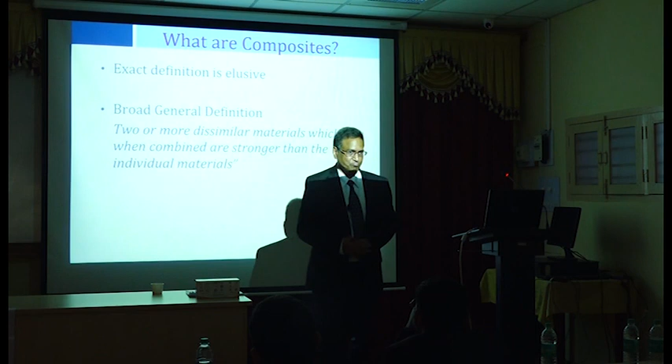Okay, so we will talk about composites. So what does the term composite mean to you? What does term composite mean to you? Perfect. That's the simplest possible definition. If you combine more than one material, can be 2, can be 3, can be 4, whatever, then we call it composite. That's a layman's definition of composite. So, by that definition,

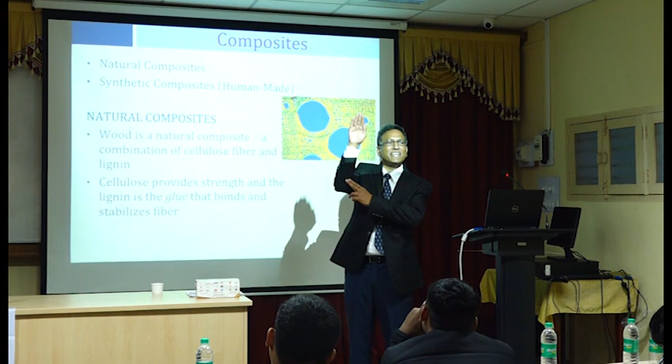is wood a composite? Of course it is, because there is fiber in your wood that gives you the actual bending. You'll see sometimes the trees are bending like this, but they're not fully falling over, right? Why is that happening? Because there's fiber in there. That fiber is preventing the tree from falling over. And then there is lignin that combine together and they act. This is the key thing. They act together. Okay? So that makes it a composite material.

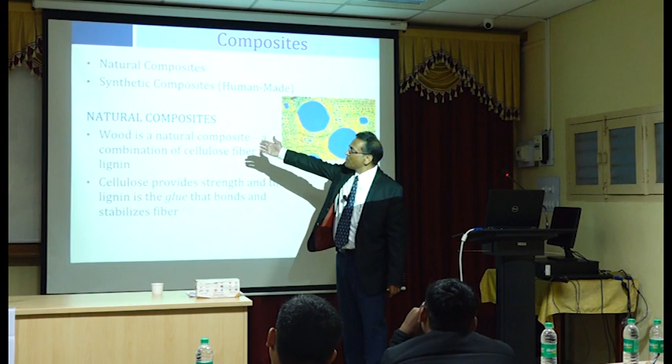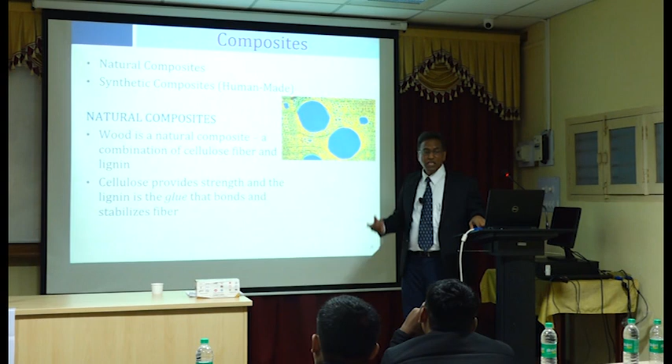So wood is a natural composite. So the fibers provide you strength, and the matrix, which is the lignin, provides, in a simple term, its glue. It keeps them together. Is concrete a composite?

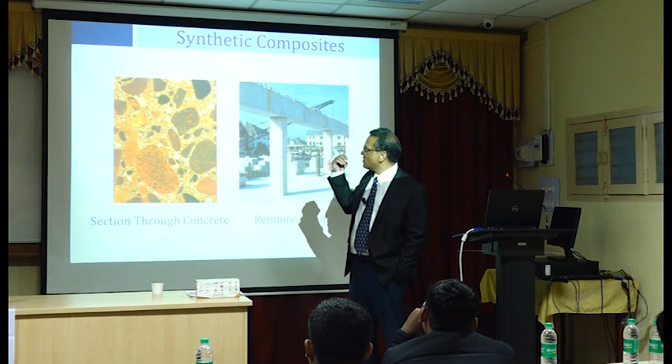Definitely, because at a microstructure level, you have so many different materials and they are all working together. Cement paste, you have coarse aggregate, you have fine aggregate, they are all combined. Once they harden, they work as a single unit.

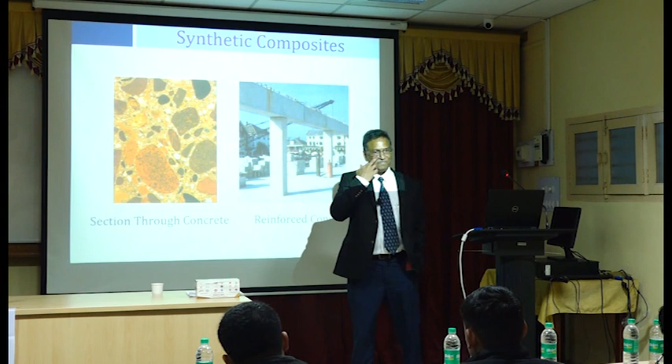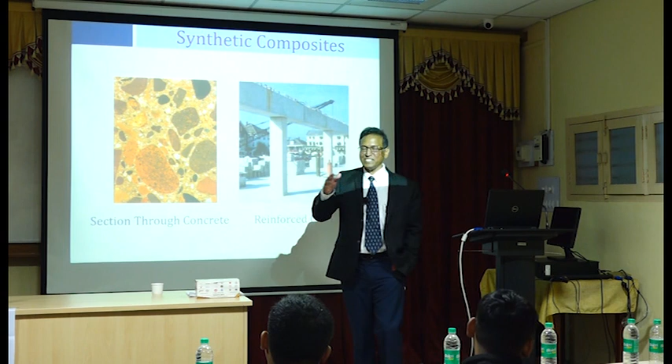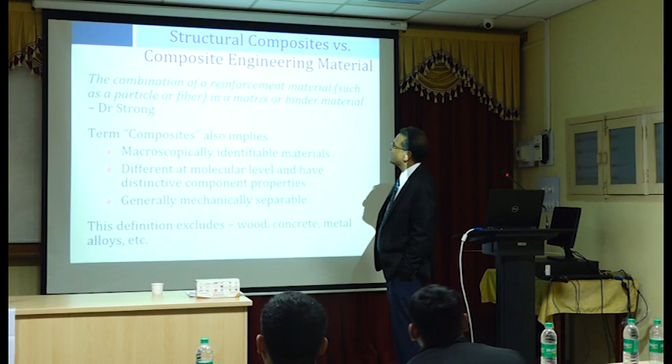What about reinforced concrete? So slowly we are building on it, right? So this is concrete. Now we are adding one more item to the material, which is reinforcing bars. We place them in proper locations to gain the strength the way we want it to gain, and that's a composite material. So based on that, we can say a combination of reinforcement material in a matrix or binder material.

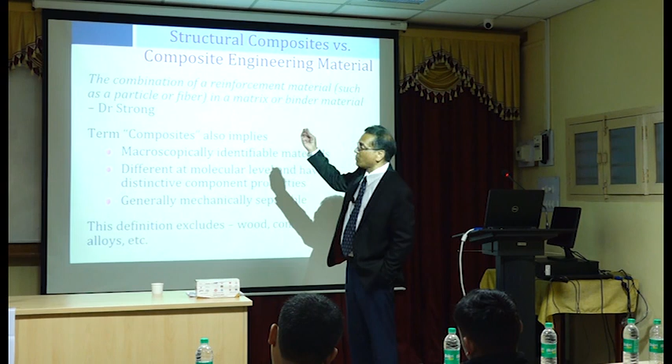So we started with saying, oh, if we add two materials, that's composite. That's what we started with, right? Then we said, okay, we want material where one is fiber and the other one is matrix, or binder. So those two, when combined, that's a composite. Okay, that's slightly one level better definition. So, in other words, we did not say that. We all know that

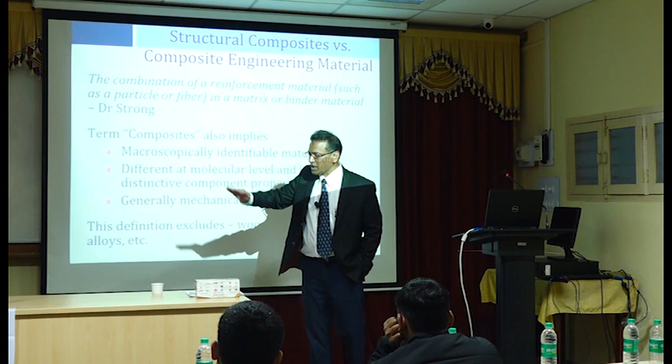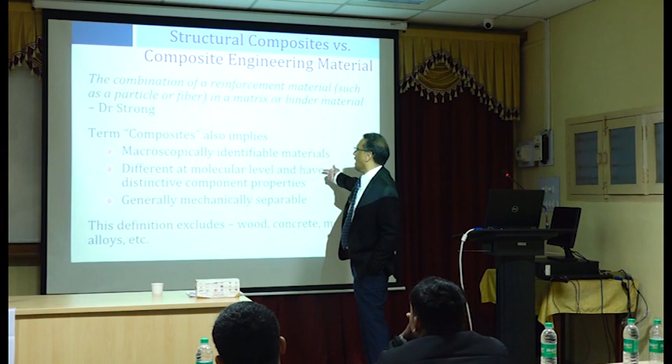composites are composed of macroscopically identifiable material. So if you cut a section and look under the microscope, you can easily distinguish between the different materials, okay? And at molecular level, they have distinctive component properties, which is self-explanatory. Generally mechanically separable. That means you can separate these mechanically.

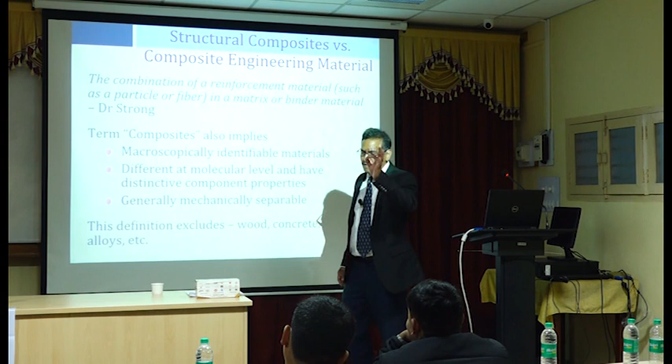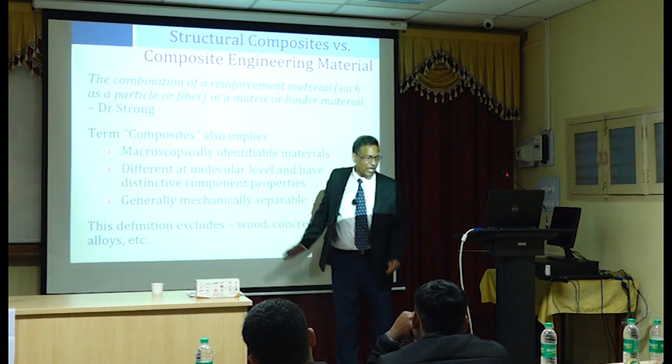Can you separate the fiber from the cellulose in a tree? You can't. So that will exclude this definition. What about concrete material? Can you separate them? No, not possible. Same thing with reinforced concrete. You probably can, but the materials will lose their characteristics. So that way we will define it in a slightly more detailed manner.

What's an aspect ratio? Aspect ratio is defined as, yes, length over the dimension. Okay? It can be diameter, it can have square cross section for fibers too. It won't always be circular cross section. So the dimension will give you your aspect ratio. The aspect ratio has to be adequate, or it cannot be overly long, to transfer the loads between fibers, and the fibers are chemically bonded.

So we are adding so many conditions here. First we are saying the composite itself needs to have reinforcement, needs to have polymer, and then you have an aspect ratio requirement to be satisfied. Then we are saying the load has to be transferred between the fibers. If they don't transfer, that means all the fibers will pull out, right? You have matrix and you have fiber, and if the load is not transferred between the fibers through the matrix, the fibers will all pull out, okay?

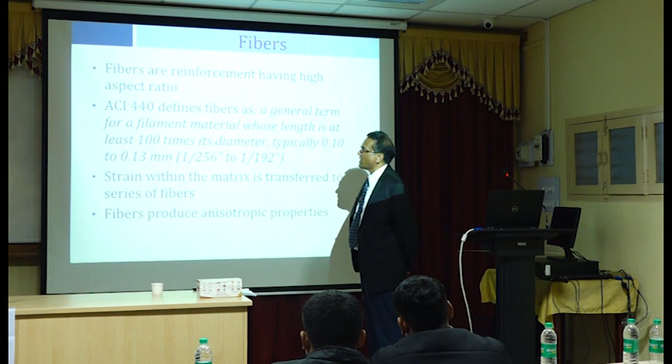So fibers are reinforcement having high aspect ratio, and ACI 440 is the primary committee that is creating all these reports on fiber reinforced polymer. ACI stands for American Concrete Institute. That 440 committee has about 8 or 9 reports. Almost all the information available throughout the world is generally represented in ACI 440. So they have it all combined, and it's a very good resource for advanced studies and to understand the common practice.

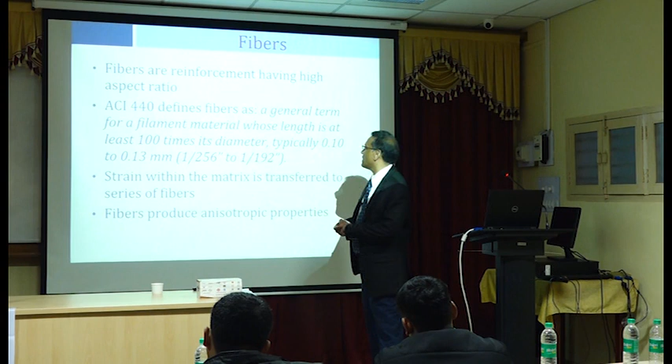It defines fiber as a filament of material whose length is at least 100 times its diameter. So now they are defining it more clearly. If the diameter is, let's say, D, then 100 times D is the minimum length you must have in order for it to qualify as a fiber. Okay, so typically our diameter is 0.13 millimeter, that's what they mention. And 100 times that is 13 millimeters. So that can qualify as a fiber, structural fiber.

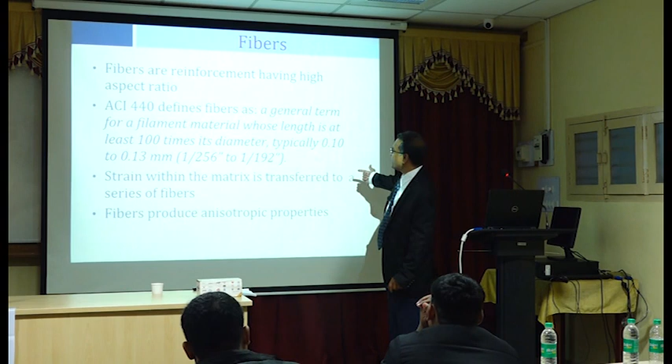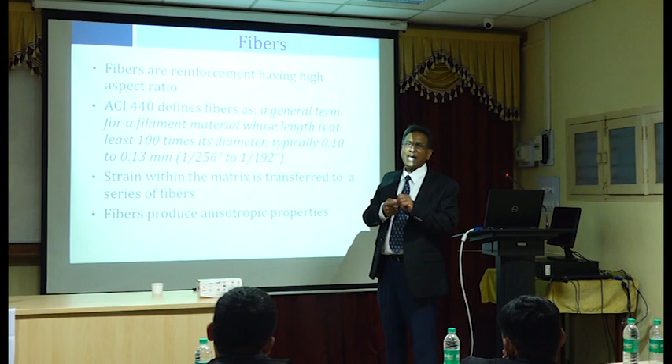And the strain within the matrix needs to be transferred to a series of fibers. So the force transfer is a requirement. Unless that happens, you really don't get any strength of the composite. Just like, I don't know if you have done any pull-out tests for concrete. You're trying to pull out the bars. At some point, the bars will pull out. That means at that time, it cannot be used as a composite material.

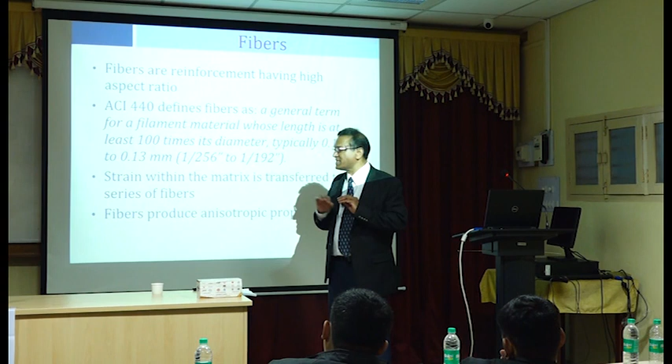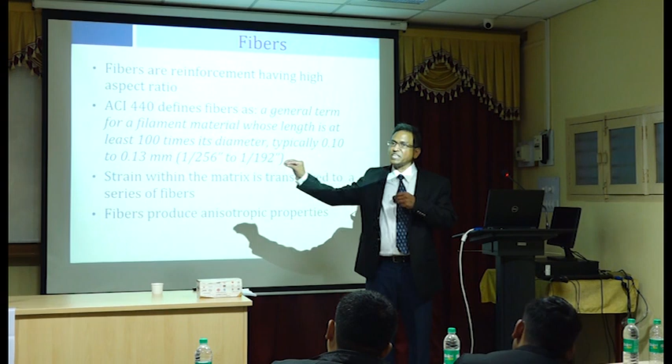So because these fibers are placed in very predefined directions, the strength of the composite is also directional. That means it will be strong in the direction of the fiber, and perpendicular to the direction of the fiber, it won't be very strong.

So what about resin matrix? It doesn't matter how good your fibers are, unless you have a medium through which there is load transfer, you are missing out on something, right? So fibers cannot be used by themselves. If you use just fibers, it is of no use. They will break, of course, and whenever you have the smallest compressive force, there will be stability problems. So in compression, the fibers will never ever work by themselves. In tension, maybe, but not in compression.

So matrix is needed to provide this kind of holding type of action for the fiber, and it's relatively rigid. If you see, the matrix is somewhat rigid when it is hard, and therefore it will give you stiffness. So stiffness is very important in case of stability, right? Whatever little compression is applied, the composite can become unstable, and if you have a matrix that gives some dimensions or some thicknesses, then it will be able to resist some amount of buckling tendency.

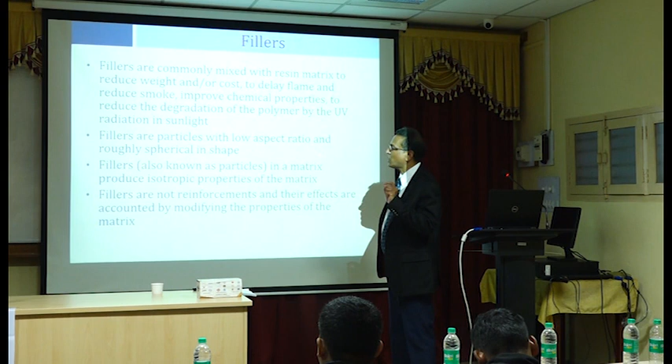What about fillers? Fillers are generally used to reduce weight if needed, and the matrix, the resin material can be expensive, and of course you can provide fillers as retardants. That means they can provide some amount of fire resistance due to heat and flame. They can be used to reduce smoke and improve chemical properties and so on and so forth.

One thing you have to take care in case of composites is exposure to UV radiation. So most of the composites are affected by UV radiation. Okay, so that's a very important aspect. So if it is directly under sunlight, after some time it will probably degrade, it will lose its integrity.

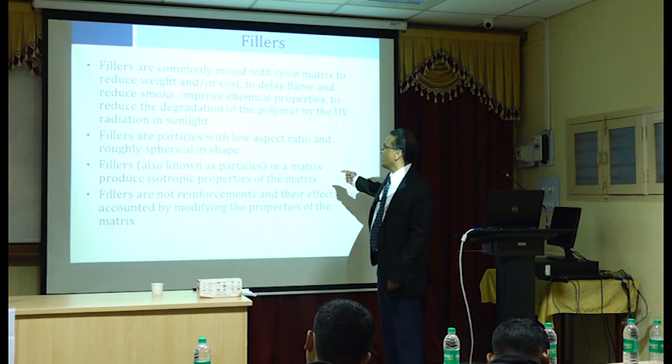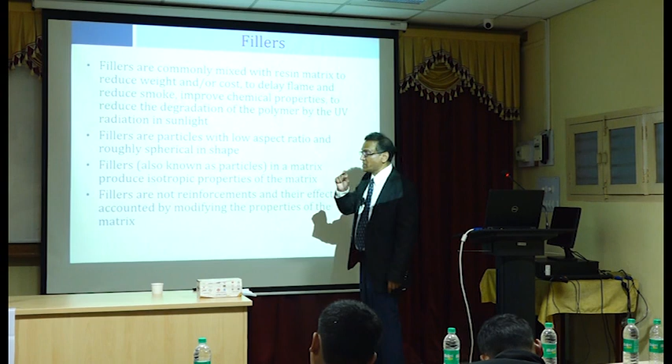So filler materials are generally low aspect ratio materials, roughly spherical in shape. Fillers are also known as particles. They are very small in size. And generally speaking, your composite materials will have smaller dimensions, so they will be normally thinner. So if you make anything very thin, what's the problem? Do you know what the problem could be? Stability becomes a problem. Okay, so it starts buckling and stuff like that. So because of high strength, you can always reduce the dimensions, but at the same time you are introducing something else, which is instability.

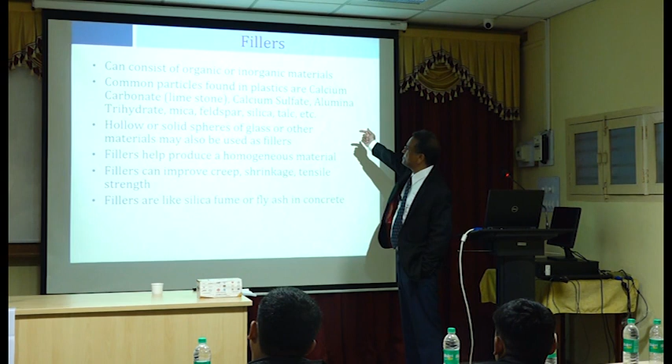And of course fillers are not reinforcement, and you already gave some examples of filler in concrete. Just like that, effects are accounted by modifying properties of the matrix, which is fine. Okay. So fillers can be organic, inorganic. You can read this yourself, but generally speaking, there are different kinds of fillers: calcium carbonate, calcium sulfate, and alumina, and so on and so forth. Okay. You can have solid or hollow spheres of glass. That can be a filler.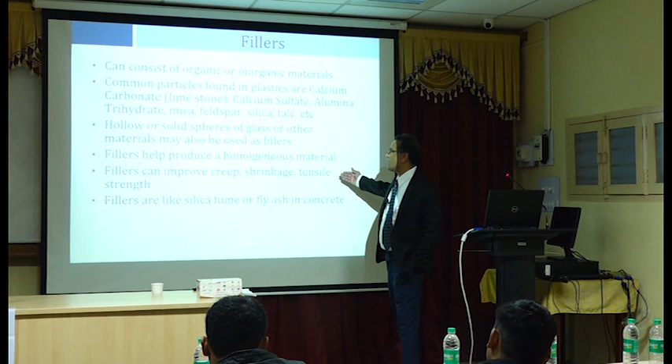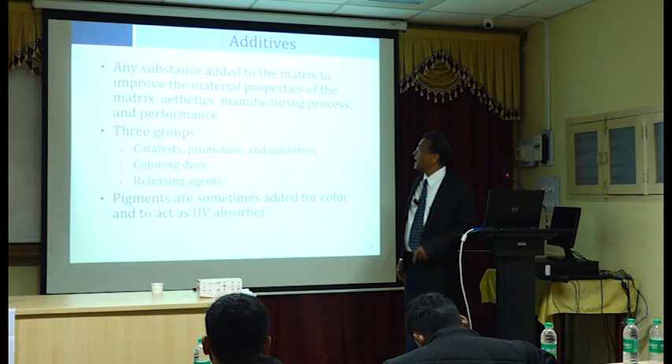They need to be distributed uniformly. That's an important requirement. Creep, shrinkage, and tensile strength. You will see creep is a problem. Okay, so there are a lot of advantages of composites, but there are also many disadvantages. We'll talk about it in the next presentation. You can improve the properties, particularly in creep and shrinkage, by using fillers. So you mentioned this. It's like in concrete we use silica fume, fly ash generally as fillers, and then additives.

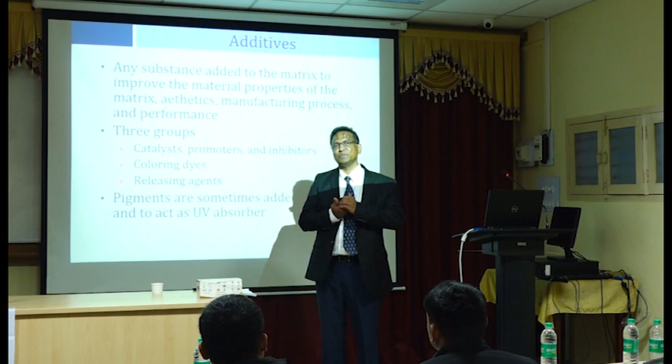So sometimes, just like in concrete, you can make concrete sleep, right? How long? Do you know what I mean? Sleep for how long? How many? Just guess.

Guess. It doesn't matter. You may be wrong, I may be wrong. It doesn't matter. How much? 72 hours. Wow. Yes, that's a little bit high, but it's easy. Nowadays, they are able to make concrete sleep for 24 hours, no problem. Particularly if you are placing concrete in a remote area, 24 hours is quite normal or quite common. 72 hours is slightly, I'm not aware of it. Maybe if you are sure, then I'll take it. You are sure it can?

48 hours you are able to make it sleep. Oh wow, very good. So that's how long, so it's like that, you know. So you can make it set very hard too, right? I mean, it's very fast, right? I don't know, I'm not a concrete expert, you are.

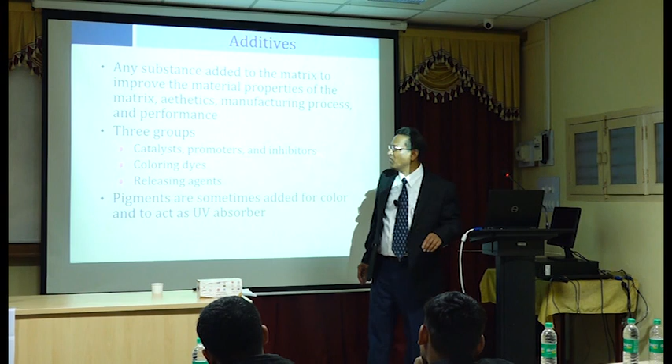So you can add polycarboxylate, right? And of course, let's not go there. There are a lot of problems with that, interaction problems with other admixtures added with polycarboxylate. Anyway, so you can make it set fast, you can make it slow down in terms of setting. Those are the things you do by additives, and you can do similar things with composites. Does it make sense?

Now, there are also other items like dyes. You can put a nice logo, and you can dye with dyes. You can change the color of the appearance, like your computer science building here. It looks so nice. I thought it was precast. Is it precast? Does anyone know? The computer science building here. Is it a precast building? It looks like precast to me, but it looks really nice. You're not sure? Not precast? But it looks like a precast.

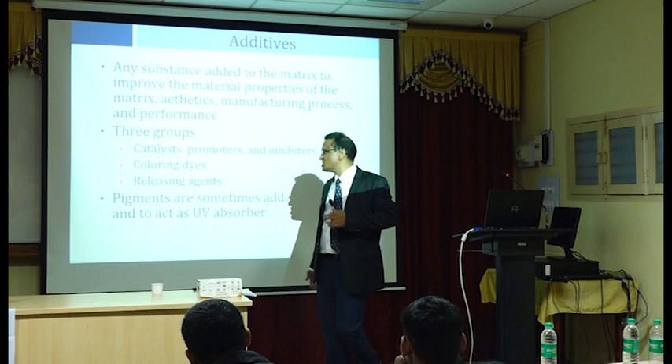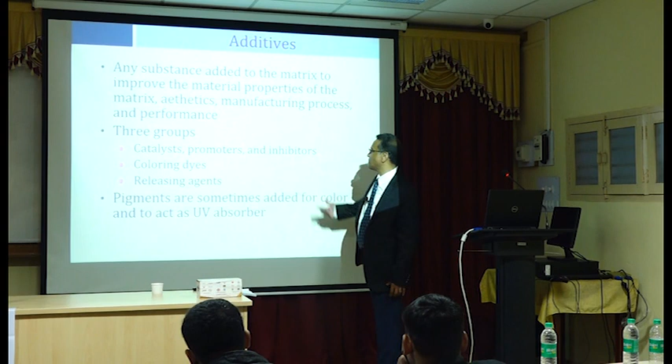Very nice. So you can do that kind of thing, and you can provide colored concrete, just like you use dyes for coloring concrete. You can use dyes in composite. Releasing agents are important, just like your form oil, right? Form oil, like if you have formwork, you're placing concrete, you provide some releasing agent. Otherwise, it will be stuck to the forms or falsework. So it's just like that. You have to have some kind of releasing agent. Pigments are added for color, of course.

So in summary, composites are a combination of reinforcement fiber in a polymer resin matrix, where the reinforcement has an aspect ratio that enables the transfer of loads. That's important, transfer of loads between fibers, and the fibers are chemically bonded to the resin matrix. That's the gist of this presentation, the summary of this presentation. Okay? Any questions? Do you have any questions?

How can we give the direction of the fiber? Say that again. How can we give the direction of the fiber in concrete? We'll talk about it. In the next presentation, I'll show you how that is done. I have some samples. I'll show you how you can define the direction of the fibers if they are two-dimensional fibers. Okay? Thank you. If I don't talk about it, please remind me. Okay? Thank you.

Yes? Is it permitted to use a fiber which has a different aspect ratio? Okay, let me put it this way. The load transfer is important, right? So if you have fibers with small aspect ratio, there will be pull out. And if there is pull out, there is no load transfer, and therefore they don't qualify as composites. So for structural action, you need to have a minimum aspect ratio, and ACI has defined that to be 100. So you can easily get that kind of aspect ratio.